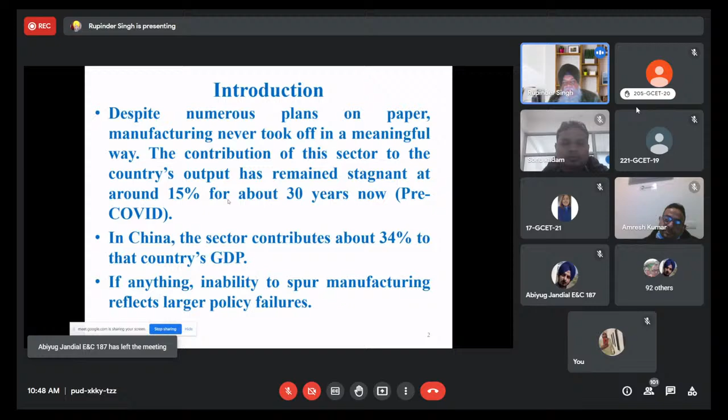The problem is not new. The Government of India is taking it as a challenge. In 2004, the Government of India set up a National Manufacturing Competitiveness Council, headed by a group of ministers. And in 2006, the Prime Minister at that time expressed his concern over the contribution of the manufacturing sector, which is 12 to 14%. It must be increased to 25 to 35%. And if you see the Niti Aayog website right now, it says we have to increase this contribution by 10% by 2025. This is really a big challenge.

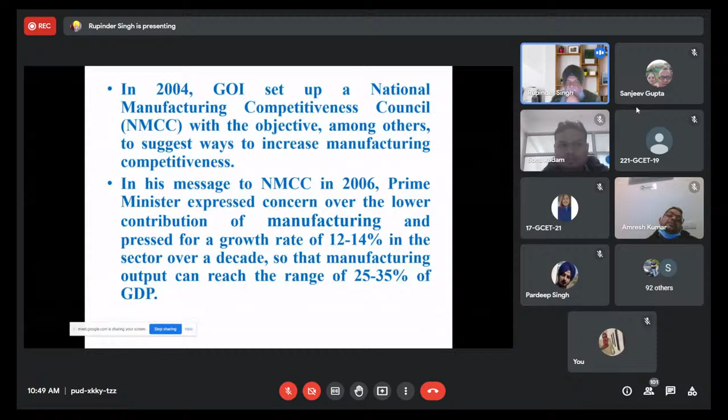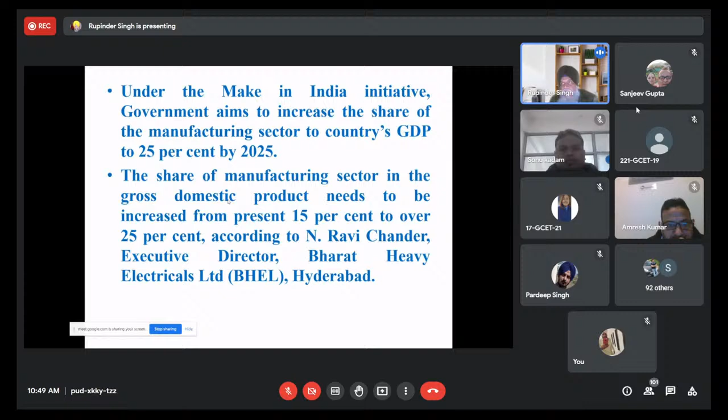If we have to make the contribution of the manufacturing sector higher, then a lot of things have to be explored. Not only the government, but public sector and private sector players are also showing their concern in a similar way, that increasing this contribution will be really nice for the country. And it is expected that if we increase the contribution of the manufacturing sector by 10%, there will be 100 million jobs for our countrymen.

There are some problems due to which this is not being done right now. These problems are like inadequate infrastructure. Nowadays, the government is paying a lot of interest, developing road networks, rail networks, all these types of things. But still, we have a problem with infrastructure. We have finance issues. We have issues like land acquisition, labor laws, and so many difficulties due to which some large players are not coming to our country. So problems are there. Now, if there are problems, should we stop, or can we have some alternative solution?

To understand the alternative solution, a lot of deliberations were going on across the country, and in one deliberation between CII and the Government of Andhra Pradesh, they came up with a very novel idea: that innovation in product and process can be the key driver for growth in the manufacturing sector.

Now, this is the key point around which this whole discussion will go on. So I need innovation in terms of product or innovation in terms of the process. If I do this, then definitely this can be really helpful for the growth in the manufacturing sector.

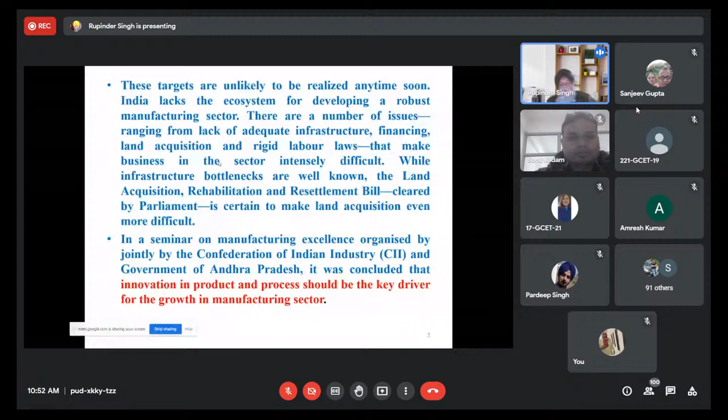Okay, before I start my presentation further on 3D printing, this is just the last slide about the information. If you see the third-party data for our country, this is by Thomson Reuters, which is now taken over by Clarivate Analytics, third-party data from the US. It says that India's share of engineering research was 4.3% in 1981, which was reduced to 2.2% in 1995. By 2010 it was again 4.25%, and if you see the 2020 data, this is again less than 5%. That means for research in engineering, for 95%, I am dependent upon the outside world.

If I just compare similar data with China, Korea, Taiwan, these countries are doing much better than us. We normally say that we are good in software, but our contribution at the international level is just 2.4%. So from here, we can imagine there is a big need, a big requirement for the country that we innovate and come up with new products. We must have our own IPR, and we launch the product first so that India will get a lion's share in the market. I think this can be one of the greatest contributions from technocrats for the country.

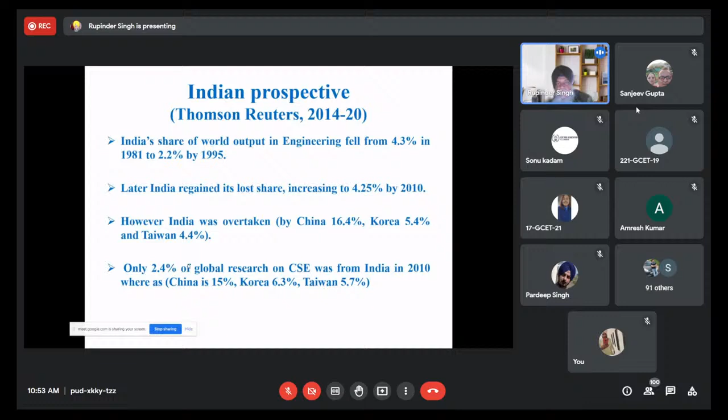Okay, now coming to the business, I have been assigned a task to talk about 3D printing. So why am I correlating this thing? Because I am interested in innovation, maybe in terms of the product or in terms of the process. And for this type of thing, 3D printing is one of the established routes through which we can do these types of activities. This particular classification I have taken from the Cheng and Chua paper, published in 2005, Journal of Advanced Manufacturing Technology, Springer.

Now what it says: rapid manufacturing, then the subdomain under rapid prototyping, we have basically three types of classification. The processes for rapid manufacturing may be additive in nature, they may be subtractive in nature, and there can be a combination of additive and subtractive. For subtractive manufacturing, we are quite comfortable. CNC machining is one way of rapid prototyping and finally contributing to rapid manufacturing. This is very much known to us.

Then in additive manufacturing, there can be technologies based upon liquid-based technology, powder-based technology, or sheet-based technologies. And under their subdomains, there are so many technologies for photopolymers, for molten material, and a number of commercial technology names are there. And then there is a third classification, which is a combination of additive and subtractive.

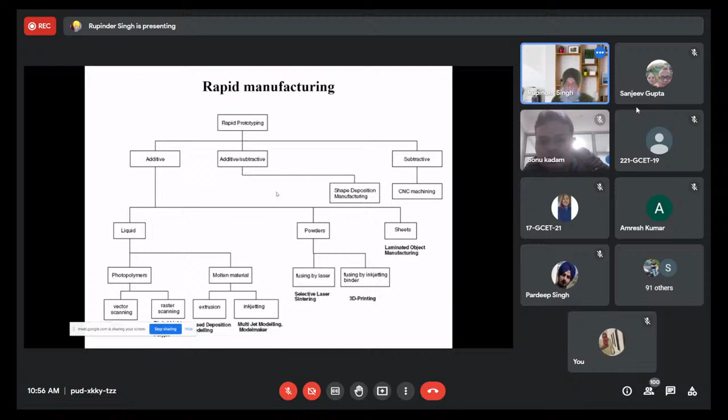Here again, my aim for discussion is not to explain a particular technology, liquid-based, powder-based, or sheet-based, but to introduce to the audience that these technologies are there. Now, if I am interested in a really good, cost-effective solution, what sort of innovation can we do so that there can be some customization, specifically for the reduction of the cost of the product? So here we are going for some of the technologies.

Now for the beginners, like we have some of the students from first year or maybe up to master's level. Some of you may be knowing about 3D printing. I will introduce some of the basic part, and then we'll share some of the case studies which can be really helpful for making a useful product.

So as you can see in this slide, I can have some data in the CAD file form. This data, which is a CAD file, is fed to the printer. Now this printer looks something like a photocopier, but this is giving me output in the form of three dimensions. So I'm getting a 3D printed object. So let me tell you how this actually started.

In the early 80s, the MIT researchers basically used an inkjet printer to come up with the first commercial 3D printer. If you just see how my inkjet printer works, I have basically a nozzle through which some ink is spilled out. Now this ink, which we call a cartridge, moves in an XY platform in a Cartesian coordinate system, and I drop a defined quantity of the ink at a particular location, so I get a 2D object.

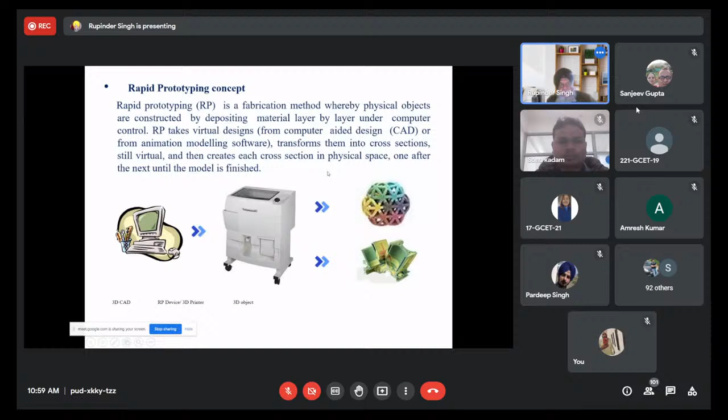So basically, this is how 3D printing is moving. I have a CAD file which is transformed into different cross sections which are virtual, and finally I am getting a 3D printed part. This is another way to understand. So I am interested in some product like this. So I am doing some layer by layer manufacturing. Each successive layer bonds to the preceding layer, which may be melted or partially melted on a build platform, till we finally get a 3D printed part.

Again, the explanation is very simple. I can put the layers by melting or partial melting. I can have a situation where layer by layer components are added using some binder, using some heat as an input, using some laser source as an input. So there are n number of technologies. Commercially, I will say 30 plus such technologies are available, and each has a different domain of working.

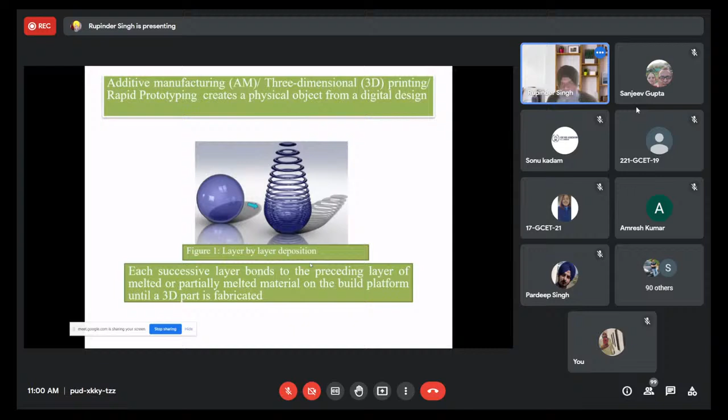Now, going one step ahead of this is the idea of 4D printing. 4D printing is basically the printing of smart materials. There is nothing like printing in the fourth dimension. This is the printing of the smart material in three dimensions only. But to add the fourth dimension as a function of time, what I am interested in is, if I give some stimulus to my material, how it behaves, whether it is growing in dimensions, whether it is changing color, or there is some change in some functional capability of this type of material. That is the part of 4D printing.

I'll give you one example to understand this. Then we will see some case studies for 3D and 4D. Okay, the example is from daily life. We normally see the sunflower. Now you see the sunflower normally faces towards the sun. So once there is a sunrise, the flower is moving in, let us say, upward direction, facing towards the sun. Once there is a sunset, the flower faces down.

So just imagine, as a typical mechanical application, I have some stimulus in the form of sunlight, which is helping me to have an up-down movement. Then there is a movement of the earth around the sun. So we see there is some rotary or angular movement of the plant or the flower, and it is always facing towards the sun. So this is basically 4D. Now the flower is not growing, but it is having some controlled movement with respect to that stimulus.

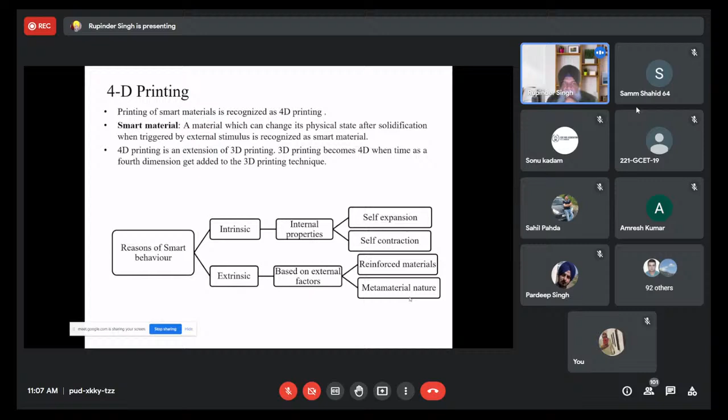Okay, I can also do some programming. It can be one way, two way, and multi-stage. Like my material is in state A, this is 3D printed. Then I give some stimulus, it changes to state B. Then give another stimulus, it comes back to state A. This is one way of programming. Material is in state A, you give the stimulus on, you give the stimulus off, it comes to state B. So this is another way, two-way programming.

For example, in this case, the stimulus can be electric field or electric current or magnetic field, right? So you switch on the current, it changes to state B. I give you one example to put my point over here. One of my collaborators is working on a telescopic leg.

He's basically a surgeon in PGI who is working on leg deformities. So basically, if you talk about leg deformities, the lengths of the two legs are not the same, right? Now what we do is we cut one leg and put in a telescopic arm. So as the patient is growing, to increase the length of the arm, we are using some magnetic stimulus through which that length is increased.

So this is how you can control the 4D part as two-way programming. Then there can be multi-stage programming. You have some material, some 3D printed part in state A, give some stimulus going to state A1, then another stimulus A2, then another stimulus. There can be multiple stages, but the important thing is there should be repeatability, right? So the circle must complete. So with the different set of procedures, with the different stimulus, it should be a closed loop structure.

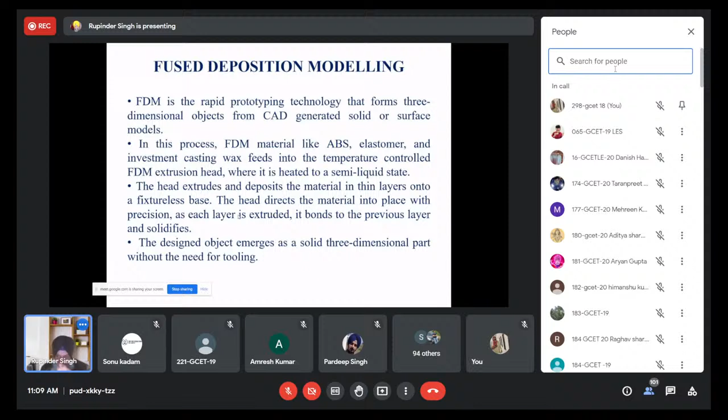Okay, now I will introduce one very simple technology, which is a polymer based technology. The name of this technology is FDM. I will show you some of the applications and functional parts that have been prepared by 3D printing, and let me introduce how we can do a startup in these types of things. With one of my collaborators in Italy, we are working on developing these types of products, and we are providing this to different manufacturers as technology transfer.

So what is the technology? Let us understand the technology first. I have a polymer spool, a thermoplastic spool. This thermoplastic material is fed to the chamber over here. So what sort of chamber is it? It has some arrangement through which a wire of the polymer is fed to a region which I am calling the liquefier. Here there is a heating arrangement inside, right? So some heaters are there. Then on this side I have a nozzle.

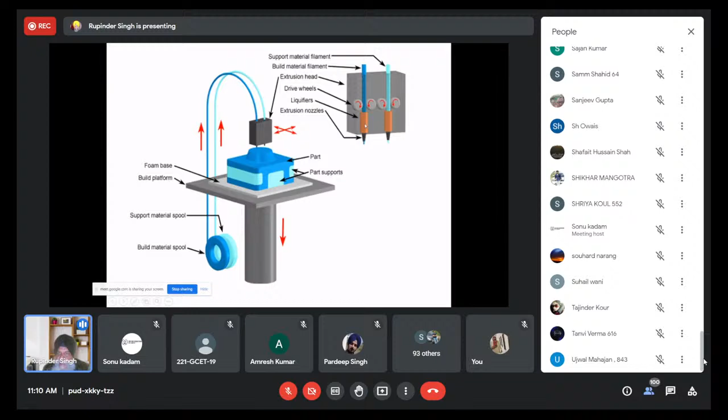So the larger dia wire, normally the dia is 1.75 mm for a commercial printer, is mechanically fed to the liquefier where I have some heating arrangement. This can heat, normally for a commercial printer, in the range of 100 to 300 degrees Celsius. Once this wire is fed and heated, I have a nozzle over here. The output wire coming from this side may have a size of 0.1, 0.2, 0.3 mm, depending upon the dia of the nozzle.

Now this fine strand of wire coming from this side is deposited layer by layer over this surface. As I am getting thickness, this Z platform is coming down. So this is how 3D printing is executed using a polymer based technology, which I am calling fused deposition modeling. So thermoplastic feedstock filament is fed to the liquefier chamber. Then I have a nozzle over here. So layer by layer deposition.

Commercially, the dia of the input wire varies from 0.4 to 4.0 mm, but the most commonly used size is 1.75. And depending upon the output fineness, I can have 0.1, 0.2, 0.3 mm dia over here. So I get a 3D printed part. Now, some of you may have a question why there are two different color wires over here. One is dark blue, another is a little greenish in color.

Now, the idea is there is a concept called build material and a concept of support material. Build materials are normally oil soluble in nature, and support materials are water soluble in nature. Suppose in this part I am interested in some cantilever type situation. Once the wire comes from this head, it will be at a temperature of, let us say, 300 degrees Celsius. So it needs a base over which this protruded part can be supported, right? So I need a support material.

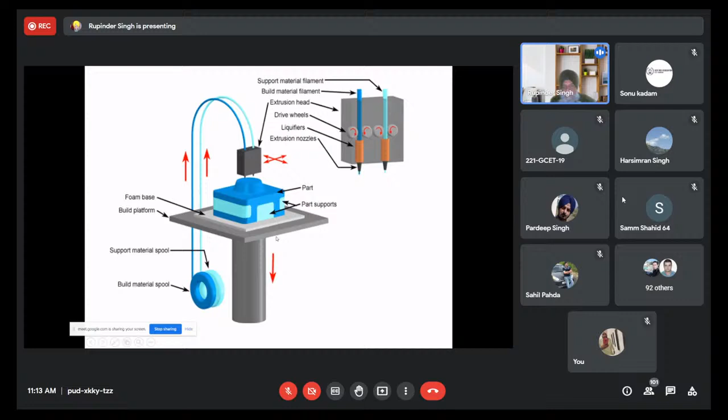Now I'm taking you to the case study of applying all these inputs so that I can develop my own feedstock filament and sell it in the market as a startup. So what we did in this study, we used the material called ABS, and we used the material PA6. ABS is one of the most widely used thermoplastic materials. This is acrylonitrile butadiene styrene. This is polyamide, basically a nylon.

Nylon 6 is basically an extrusion grade of wire that can be extruded. And it has been reinforced with banana fiber, and we tried to ascertain their thermal, mechanical, and morphological properties. Actually, once we started this work, one of our collaborators from Jalgaon explained to us that in his area there is a lot of banana fiber as agricultural waste. So we need to come up with some novel solution that can be helpful in managing that type of waste.

So we explored a paper. There was a paper of Baharin et al., which explained how to condition the banana fiber. Using that paper, we prepared banana fibers of 1000 micron length and 100 micron diameter, cylindrical shape. And this was blended at 5% by weight in ABS and the polyamide.

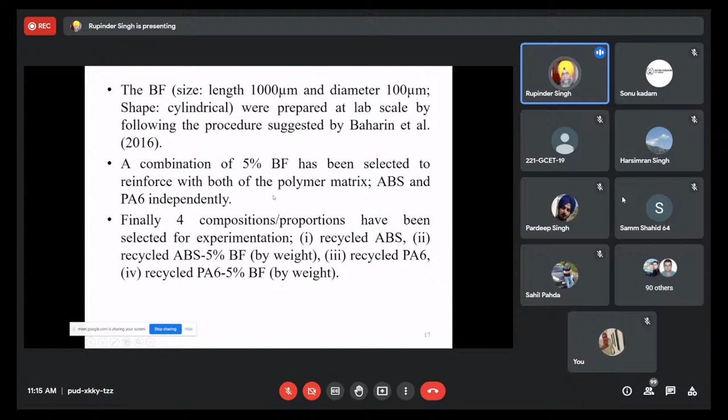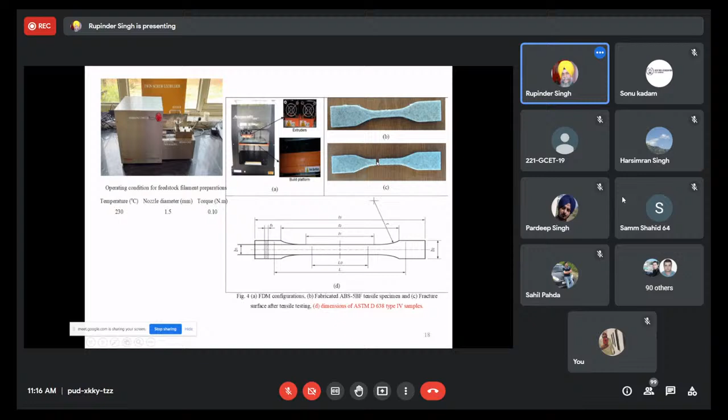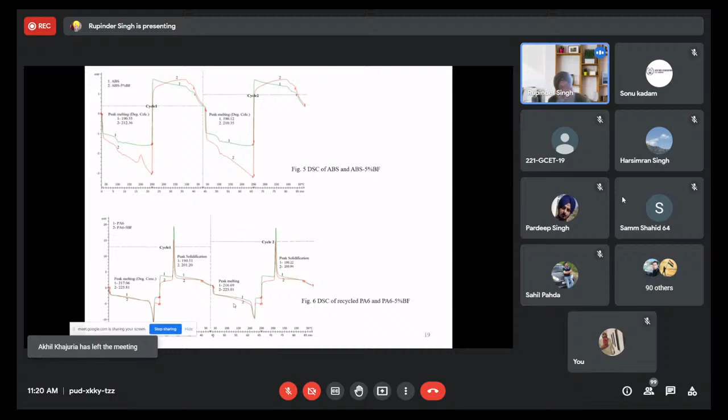So some UTM testing for the load, tensile strength, elongation, supported by their morphology. This we actually observed, and of course these were correlated with their percentage porosity, right? So some optimized values have been explored. Basically, the idea here is that 3D printing is known to me. I am using right now the cartridge or consumable which is ready-made in the market.

Why can't I have my own cartridge, which can be as per my resource availability? Suppose you are in the northern part, you have a different agriculture waste available. That agriculture waste we can use as a reinforcement in some of the thermoplastic, which can help two problems. One is the plastic solid waste problem. Second, the farmers may be advised not to just put their waste on fire.

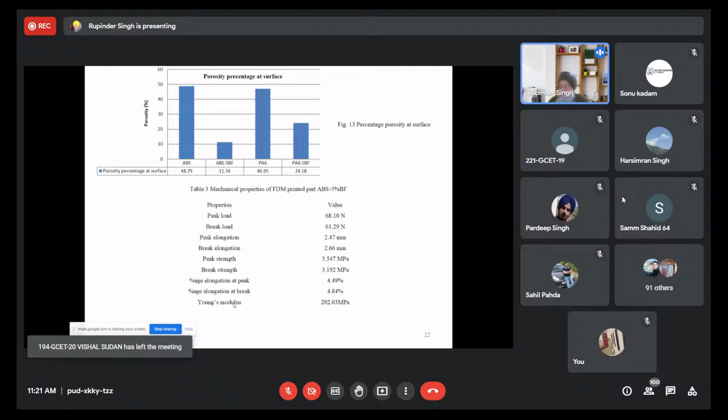They can actually use it for increasing some of the mechanical properties of the material. If you see in this case specifically, the percentage elongation after the reinforcement was significantly improved, right? So we can use this type of feedstock filament or wire for tying some of the iron bars, which can help me in roof construction in a big way. So there can be numerous applications of these type of 3D printed structures.

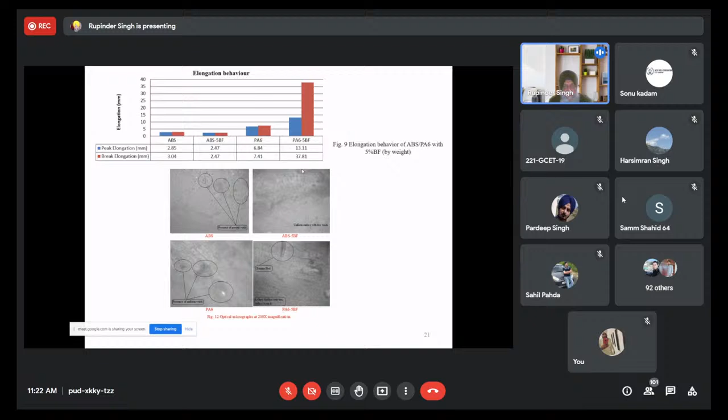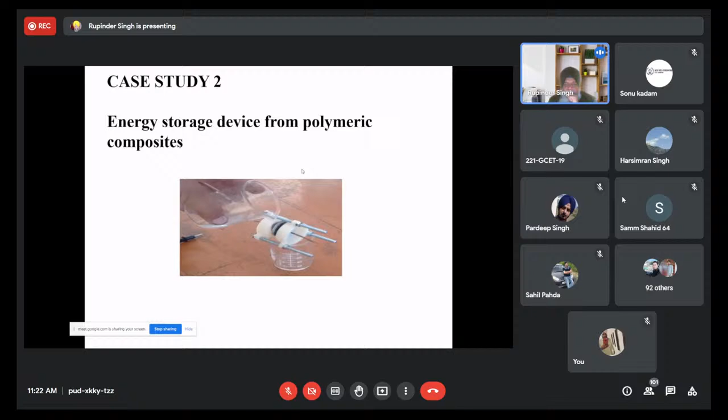Now, this is another case study that I want to discuss with you for the 3D printing part. Here, we prepared a dry cell as an energy storage device. The cell consists of 4 zones in which there is MnO2, zinc chloride and ammonium chloride electrolyte solution. Then you have graphite and the zinc plate. Once we assemble all this, we get chemical energy converted into electrical energy.

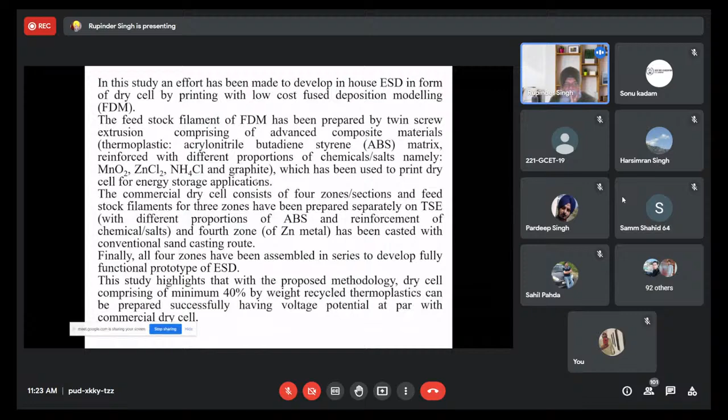So what we did in this case was use different quantities of the reinforcement like the graphite powder, then zinc chloride and ammonium chloride, and then the MnO2. These different combinations were put to a tester called MFI. This is a melt flow index tester, which gives us the value in gram per 10 minutes. You can take it as a reciprocal of the viscosity.

In other terms, if I have a high MFI, I can prepare the thin section. If I have a low MFI, preparing the component for the thin section is really a challenge. So how does it work? I have a barrel here in which I put my material, then apply some load. Here is a temperature condition. Here is a die, and I am getting a very fine wire, and I weigh how many grams per 10 minutes of this wire is coming.

So what we observed, with 100% ABS, the melt flow index was coming as 9, right? Then I go on adding the reinforcement like graphite. Once I put 90 and 10, the MFI was significantly reduced. Here I just want to tell you, for the commercial open source printer, an MFI value from 2 to 3.5 is really acceptable.

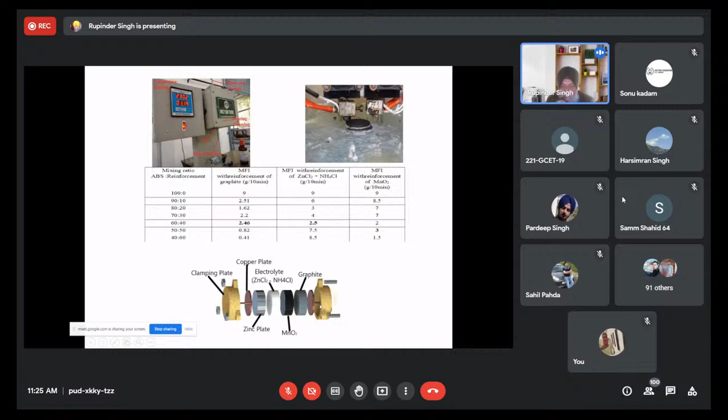So similarly on this, we selected something in between, that is 60 and 40. Then we printed the disk. You can see the printing going on over here. Then these were assembled, and we got an output. Initially, once we assembled it like this and put some copper wires to get an output, the charge voltage was not observed. So we put some drops of acetone at the interface, and we suddenly dissolved the interface, and finally we got a good quantity of the charge.

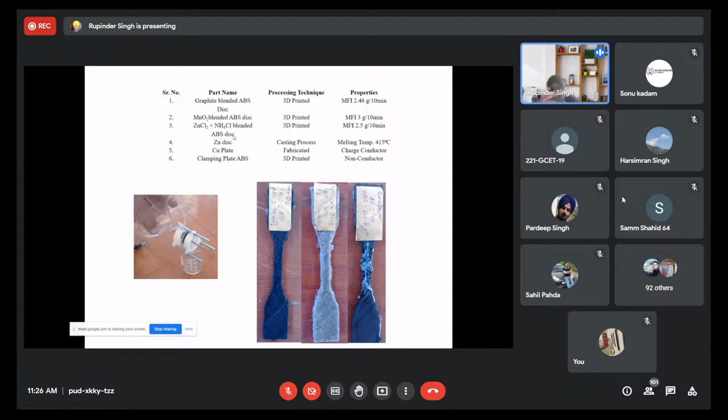The idea over here is what we observed. This zinc chloride and ammonium chloride blend disk is normally consumed as compared to the rest of the disks. So if I print a cell like this, only the consumed part I am going to replace, and the rest of the parts are as it is. I can use this cell for a longer duration of time.

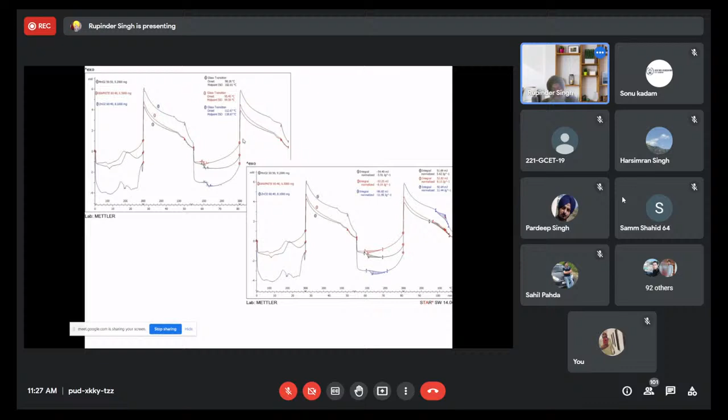We did the thermal analysis like I explained in the previous case, and what we observed in the repeated heating-cooling cycle, from room temperature to 300 and then back to room temperature, my cell was stable up to 95 degrees. Whereas our commercial cells give us the desired output only up to a temperature of 55. So we were able to use 40% of the plastic solid waste, and I can use it at very high temperature. The third important thing is, with 3D printing, I am getting design flexibility.

And now the startup things, like in this case, think of preparing a cell like a sticker. So one layer of one material, then a second layer; if one particular layer is consumed, you can just peel it off and then think of printing. Another layer I can put like a sticker. Then if I'm interested in a higher charge value, basically I have to increase the volume over surface area, so I can think of a similar battery using sticker-type cells. So that can be another advantage of preparing an energy storage device like this.

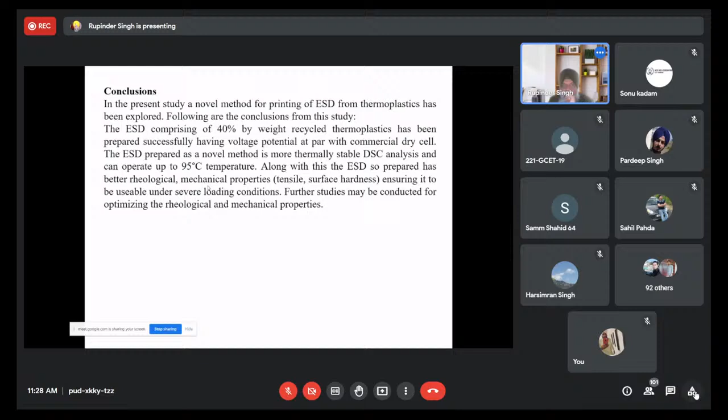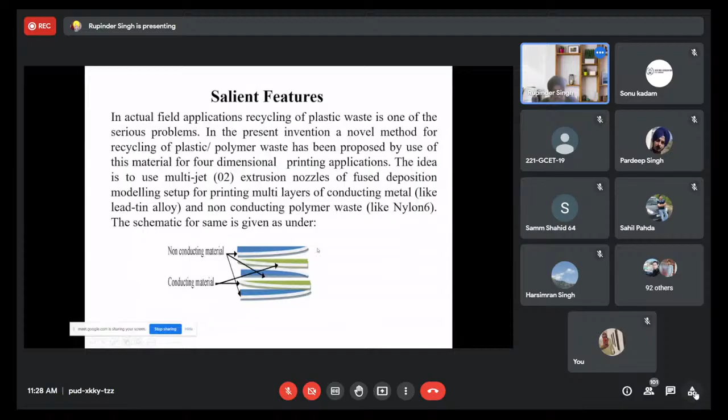Now the 4D part, this is derived from a very simple experiment from the first year of my BE program. You see, here what we did is we printed some layers like this. Here is a non-conducting layer, then the conducting layer, then non-conducting, then conducting, and then non-conducting. Basically, the idea is to print a multi-material. So some non-conducting ABS or polyamide, whatever nylon you can use. Then the conducting one has been reinforced with graphite. Then ABS or nylon, then with graphite. So I got a multi-material printed component.

So what we did is allow the flow of current in a particular direction. DC current was used. Once the current was flowing in this direction, we are able to get north and south. Similarly, here again north and south. So what will happen if the situation is like this? There will be attraction between the north and south, so I will feel a compression, right? Now I am interested in expansion, so I am changing the direction of the current. So here is south and south, so there is a repulsion.

Basically, I can think of making a transducer which is 3D printed. It has numerous applications I will share with you. This is something 4D because I am using a stimulus, a magnetic field, and every time I am getting a controlled expansion or contraction.

As mechanical engineers, we are quite comfortable with a material removal process called ultrasonic machining. For some students who have not studied unconventional machining, this may be a new process. Let me explain in 1 minute how it works. I have a transducer over here, which converts electrical input into mechanical vibration. These mechanical vibrations are amplified using some design of amplifier. There are different designs, like cylindrical and conical, so that the vibrations are focused at this end.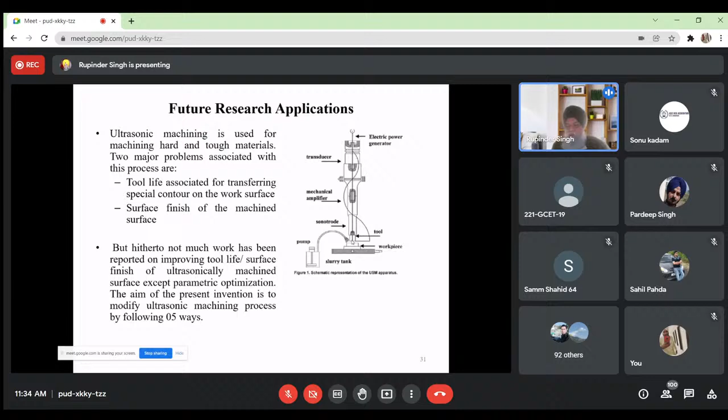So what we actually did, to reduce the weight and to have a better tool life, is we 3D printed this tool. So this is a 3D printed tool. This is basically the tool head, and we divided this tool into 3 zones. This zone had Al2O3 particles reinforced in polymer of coarse size. Here the Al2O3 particles reinforced in polymer were of relatively fine size, and here were the super fine size. These three different zones were used to do the drilling.

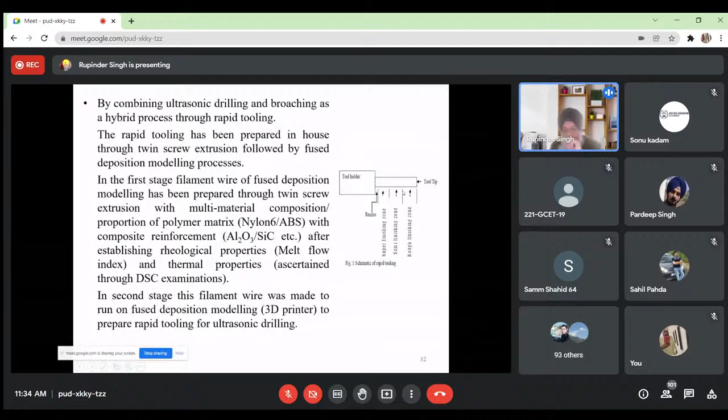So what we expected out of this was the combination of broaching as well as drilling together. So this is really an advantage that you can get only with 3D printing. These types of tools are not available in the market. You can think of making a form tool and doing these types of combinations.

Okay, another thing that we can do for developing our startups: in the case of commercial 3D printing, we have a nozzle like this. So once we print the component, I get an output in the form of an ellipse. This is basically because of the Barus effect. The Barus effect says that if I am printing a thermoplastic material, the output comes like this, right? So the stacking of the layers is like this, and you can see there is an air gap. Because of this, I need to do some post finishing operation.

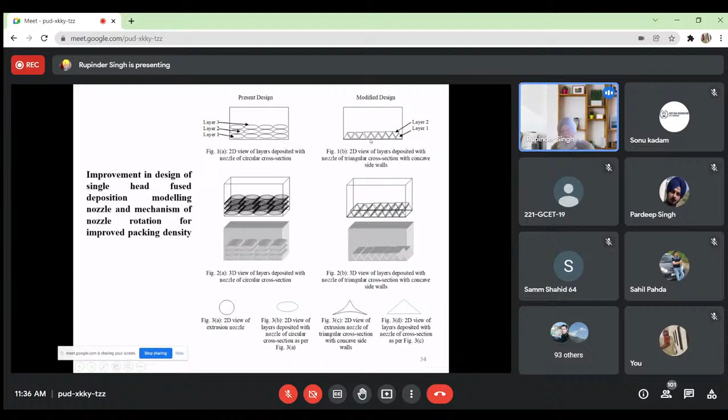So what we actually did, as a startup type thing, is we innovated on the nozzle, and in place of making it round, we basically made a concave structure like this. Because of the Barus effect, we get the result like this, with the stacking of the layers this way. Then for the second layer, we have a motor which changes the nozzle to another direction, so the second layer is deposited over the first layer like this. Now in this case, you can see there is less air gap, so a better post finishing situation can be there.

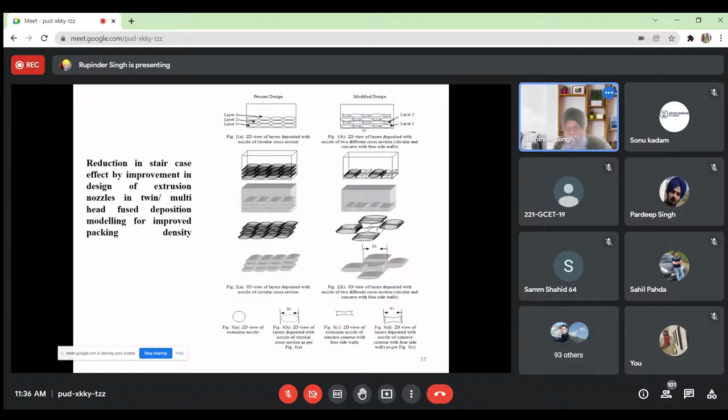Similarly, in another way, if you are having two nozzles or three nozzles, you can think of making an innovative nozzle design in which layers are stacked in this way, one layer like this, second layer like this, so that there can be a better control of the air gap. So these type of things can be really used. We can innovate and develop our new product.

Okay, before I conclude my discussion, one of the 4D actual applications on some innovative structure I want to share with you. Now, this is the real application that we have done in some innovative structure for the 3D printing. This is on some heritage structure. This is the project under the SHRI program, Science and Technology for Heritage Structure by the DST, Government of India. I'm interested in preservation of the heritage structure.

Now, if you see, as per the schedule by the CPWD, heritage structures are classified into three grades: grade 1, grade 2, grade 3. Grade 1 structures are those which are under the control of Government of India, like Taj Mahal. Normally, the preservation is by the Archaeological Survey of India, and it is really difficult to work on these type of structures because a lot of protocols are there.

Then the grade 2 structures are under the control of, again, maybe the Archaeological Survey of India through Government of India or some state governments. But again there are a lot of protocols we have to follow. Then there is grade 3 structure, which is of course a heritage structure, but not under the control of government. Normally these are private properties, and people are working on these type of structures as a proof of concept, and then finally it is transferred to grade 2 and grade 1 structures.

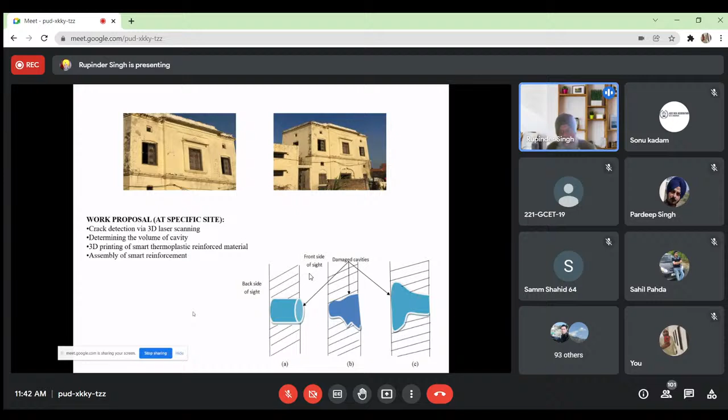So air pressure is changing, maybe in a clockwise or counterclockwise direction. I can screw or unscrew my nut and bolts. So similarly, once I am interested in filling the cavity inside, I'm basically squeezing it. So once it is entered, I am giving a stimulus and it is taking the shape of the cavity.

These are some of the structures over which we are working. These are all British period bridges. You can see over here. Here is a structure where the lower part is under the compressive load, and in this composite itself the upper part is under the tensile load, but the composite is the same, right? We are interested in maintaining these types of structures.

This is another location over which we are working. Its name is Sarai Lashkari Khan. This is on the Lahore Delhi National Highway, something around 13 kilometers from Ludhiana. This was built in 1592 by a Mughal general. His name was Lashkari Khan. So these are some of the structures.

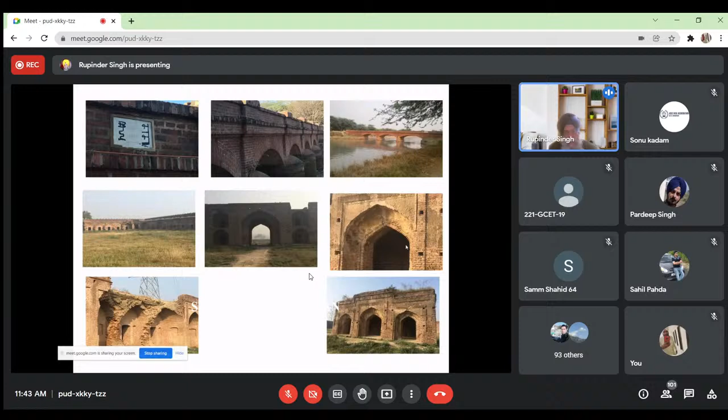Now I will give you some proof of concept. For the proof of concept, we used three different materials: HIPS, ABS, and PLA. HIPS is high impact polystyrene, ABS is acrylonitrile butadiene styrene, and PLA is polylactic acid. So we measured their MFI. This is the observed value. This was something around 7.5. Then standard deviation and standard error were calculated.

What we observed: in case of HIPS, the MFI was 7.5. In case of ABS, the MFI was 8.7, and in case of PLA, the MFI was 13.52. That means if I use these three materials, for the PLA I will get a more fine structure. Then we tried to see their Young's modulus. In case of HIPS, it was 112. In case of ABS, it was 175, and in case of PLA, it was quite less.

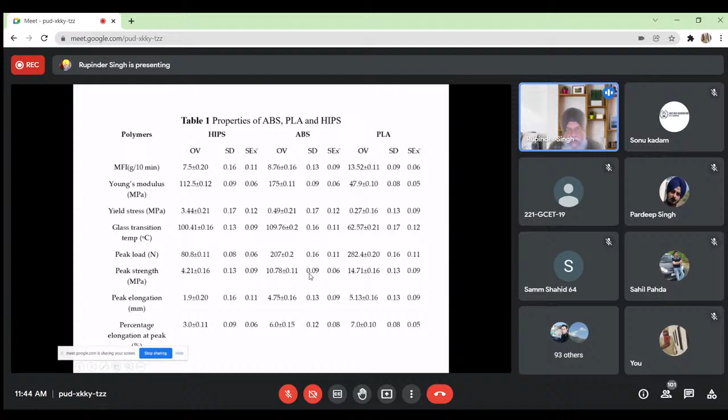Similarly, we observed the other properties like yield stress, glass transition temperature, peak load, peak strength, peak elongation, and we tried to print this component on a 3D printer. Parameters like the nozzle diameter, filament diameter, layer height, default printing, infill pattern, perimeter speed, travel speed, extrusion temperature, and print bed temperature were all kept constant.

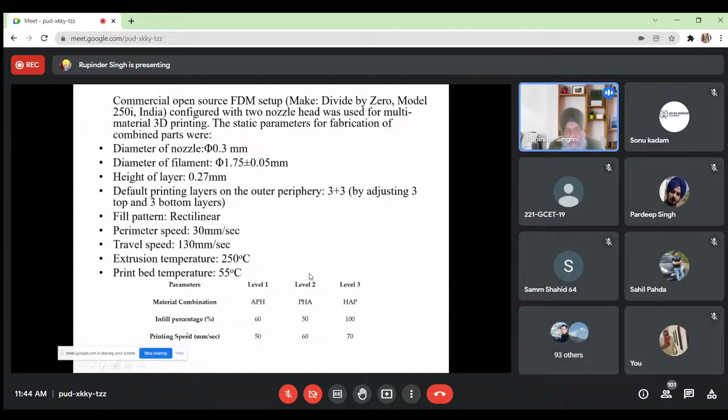What we did differently is we printed multi-material with different combinations. In this case, ABS first, PLA middle, HIPS last. In another case, HIPS in the center. In another case, ABS in the center. We varied infill percentage and printing speed, and printed tensile samples like this. You can see here PLA on the top, here ABS on the top, here HIPS on the top. This is a stress strain diagram for a single material tensile coupon for PLA, ABS, and HIPS.

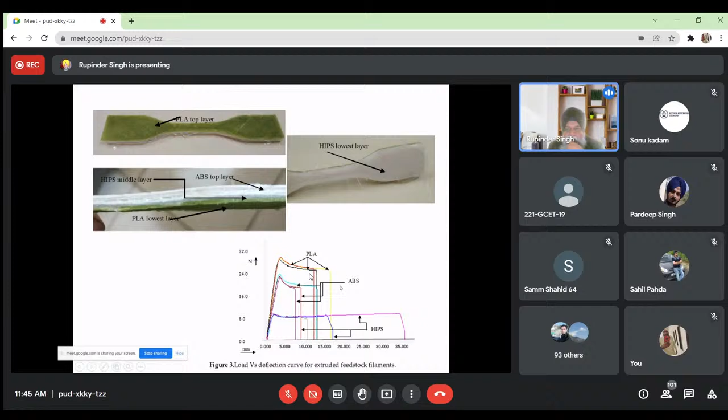We also did their thermal analysis, like heating and cooling cycles. We observed that PLA was the most thermally unstable material compared to the rest. We looked at their stress strain curves on a typical UTM and established the area under each curve to get the modulus of toughness. Then we looked at the microstructure.

Now you can see this is ABS layer by layer stacking, at 30x magnification. Similarly for the PLA, we got some stacking of the material. Similarly for the HIPS, you can see there is layer by layer deposition.

Now in this case, I printed the ABS first and the PLA on it. We observed some side flow of the material and some globule formation, and once I did the reverse, PLA on the base and HIPS in the middle, there was no such side flow. Now if I compare curve 1 with curve 4, for curve 1, this blue curve, this is the area under the curve, and for sample 4, this is the area under the curve.

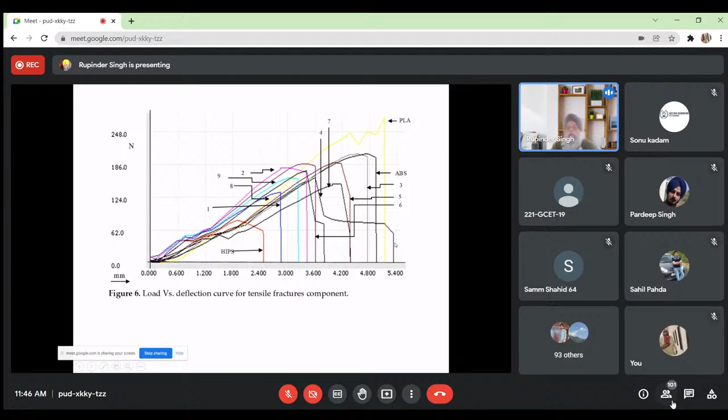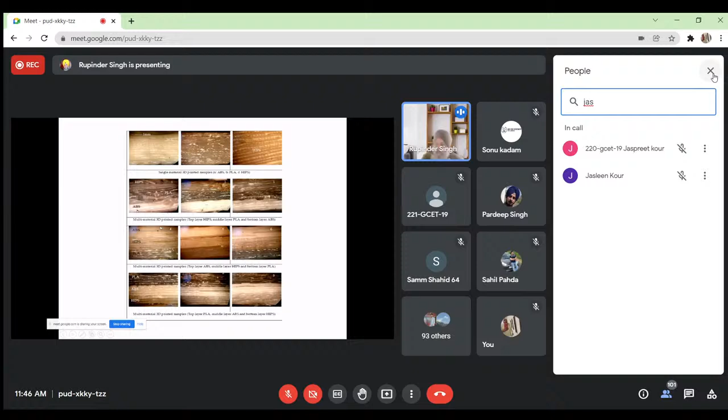So we can compare that the modulus of toughness is much better in experiment 4. That means this configuration is better if I want better modulus of toughness. So this is another important advantage: if we are interested in better properties in multi-material printing, we can think of using these types of materials for printing applications.

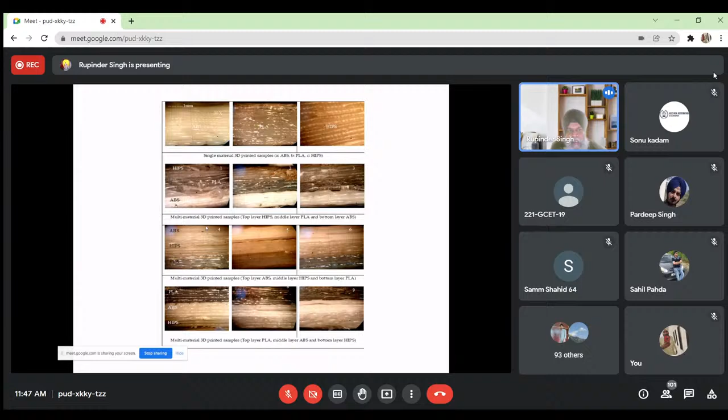Now just imagine the same arch type structure, where I need a better compressive property, so I will put that on the lower section, and on the top where I need a better tensile property, I will put the other material. So this is the way we actually proceed for the multi-material printing of these types of components.

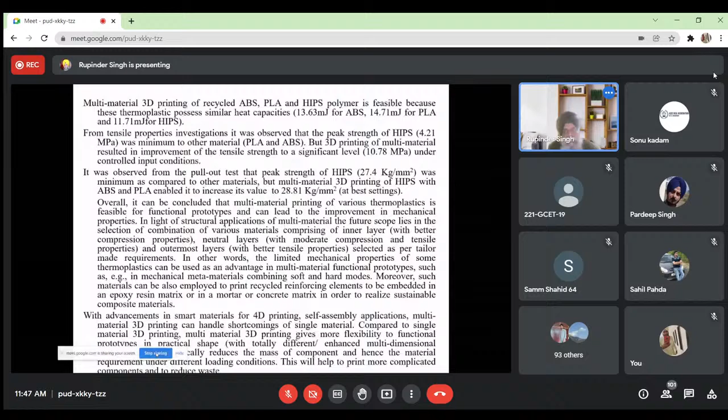So these are some of the basic case studies that I want to share with you. We have some more case studies, but I believe that these will be sufficient for the starting purpose. Now I would like to answer some queries if there are any from the audience. That's some basic things from my side. Any question from the audience, I would like to answer.

Sir, I had a query regarding FGMs, functionally graded materials. Yes, please. Will we use a different set of binders for different layers, or can the same binder be used for manufacturing a whole functionally graded material? Basically, if I am using the FDM technology only, the binder is actually not there. We are using the temperature. What you can do is SLS.

Yeah, but if we are interested in FDM only, I can think of getting a better property with a different heat input, right? So that can be one of the ways to get a better bond strength. If you are using some adhesive based 3D printing, we can think of taking the concentration of the binder as the parameter. Yes. Thank you, sir.